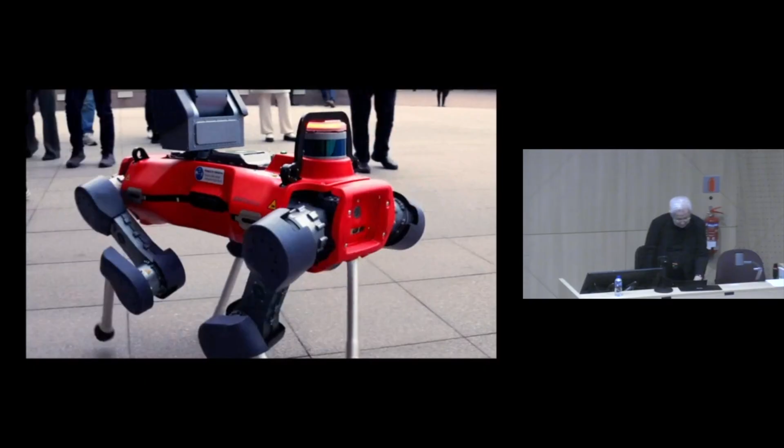The Robotics Center idea is really about how we can bring an environment for collaboration. Our idea is really bringing multidisciplinary research to work together with industry to create innovations that will make an impact on our planet and on people.

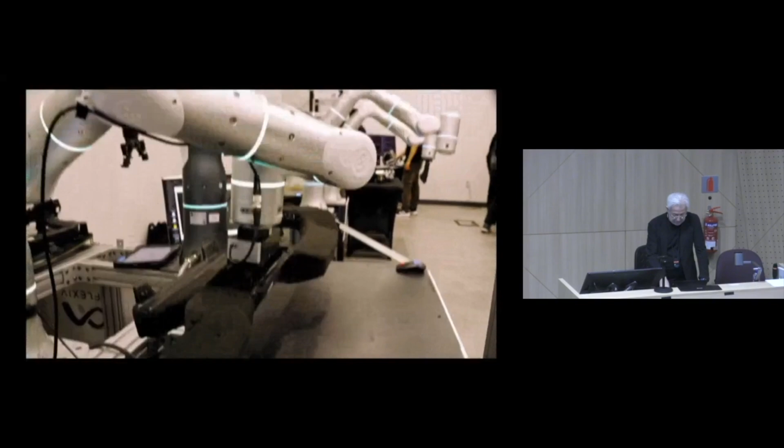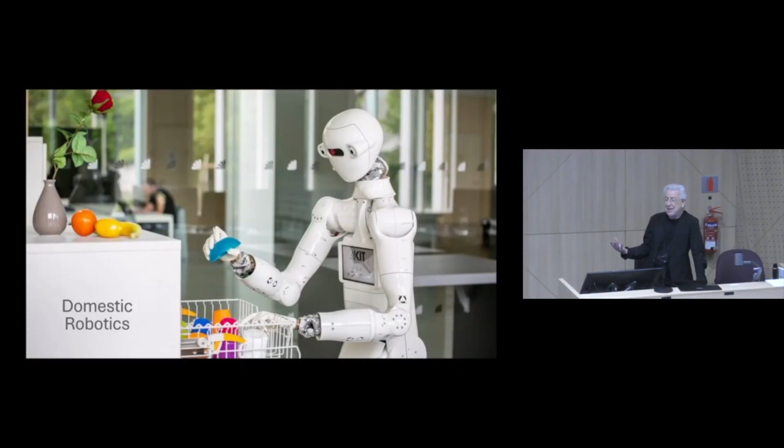So at the opening, we had about 1,000 people attending, and it was an amazing gathering, discussing all kinds of research topics, from domestic robotics, assistive robotics, human-robot interaction, new material technologies for sensing, new ways of thinking about surgery.

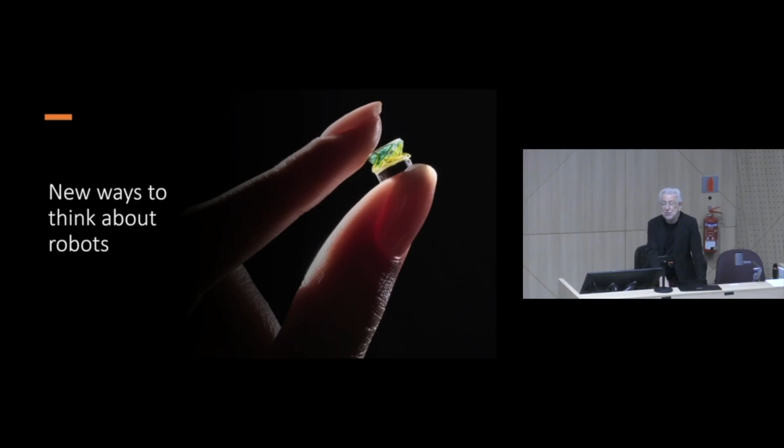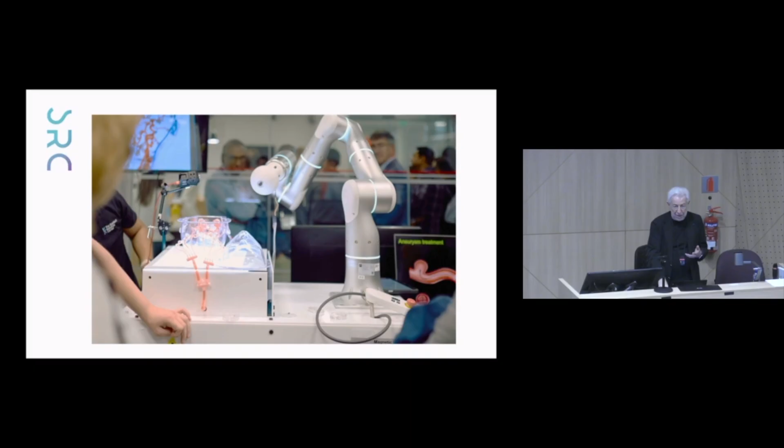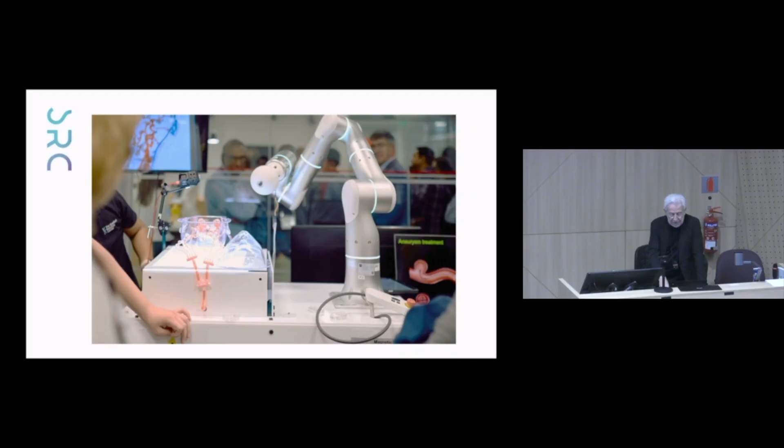We all know about Intuitive Surgical, but there are much more things to be done and new ideas to come. This spinner you see here is controlled with a magnet, and this magnet could be miniaturized and put inside a robot arm. By injecting this spinner into the bloodstream, we can do surgery in the brain. So it is quite remarkable, all these new ideas that are coming.

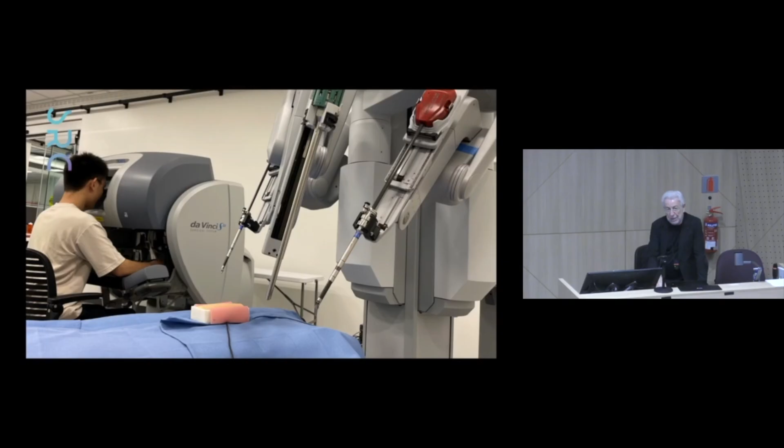I will discuss ultrasound scanning a little later as an example of how we work with haptics and teleoperation. Of course, we have new ideas about how to improve the Da Vinci system. There is a lot of work in motion capture of human motion, but this is not only done for art—it's also done for understanding human motion, to help athletes, to help injured people, and to also animate robots.

And basically it's quite interactive. There are a lot of interactions that also bring therapy for kids with problems in communication, and all kinds of language communication with different robots. These are collaborations with the Karlsruhe Institute of Technology, and there are so many other collaborations and projects—this was just the first day.

It was, I remember, November 1st was a Friday, and we had a whole day of presentation on Saturday with buses bringing people to the center back and forth, and it was really quite amazing.

Just to summarize, what we are trying to do is really to create this bridge between research and the real world, where we are able finally to see the result of our research, but when integrated, work together with everyone else through collaboration.

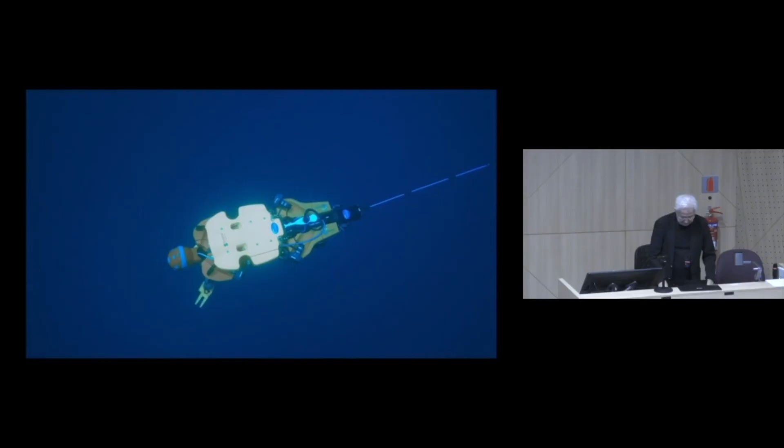This robot would enable archaeologists to excavate countless wrecks of warships, merchant ships, aircraft, and submarines from every era that have up until now been totally inaccessible. But how can we be sure that OceanOneK will withstand the extreme pressures? Or that its bionic hands will be able to recover sunken objects from the abyss?

So the Archaeologist of the Abyss is a documentary film that has been receiving a lot of awards, and we will not see the film today, but I have a very short summary at the end, about 6-8 minutes I will be able to show. Now, the film tells the story of the expedition we had in the Mediterranean around really the end of COVID. It was quite interesting.

We were building the robot during COVID, and we were assembling this robot and testing it in the pool that was declared a laboratory because there was no one allowed to go to the pool anymore. And we were able to take this robot and deploy it in all these locations from 40 meters all the way to 1,000 meters.

It was quite amazing because going there, we needed a boat. We were working with our colleagues in the Department of Archaeology in France. Here on the boat, you can see the robot being deployed. To the left is the control room where we have the haptic devices. With the haptic device, you are able to touch and feel what the hands of the robot are touching. And through the eyes of the robot and your stereo vision, you are able to see what the robot is doing.

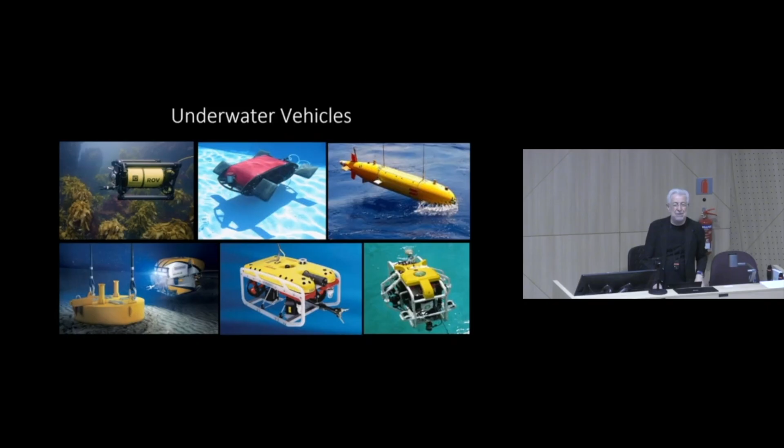So what is different? For those who don't know OceanOne, what is different from many of the great robots built that allow us to explore and see what is underwater, very deep? Well, this robot is capable of manipulation. This robot is capable of interacting with the physical environment, not just to see, but to do. And that means now it is complicated. You need sensors, you need arms, you need grippers, you need to coordinate body motion and everything.

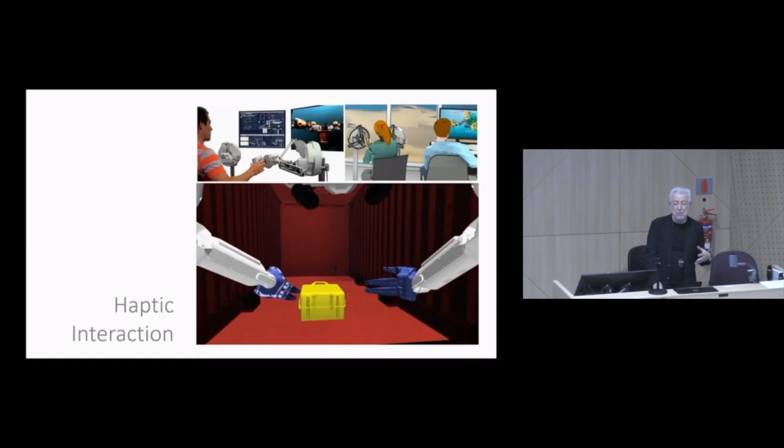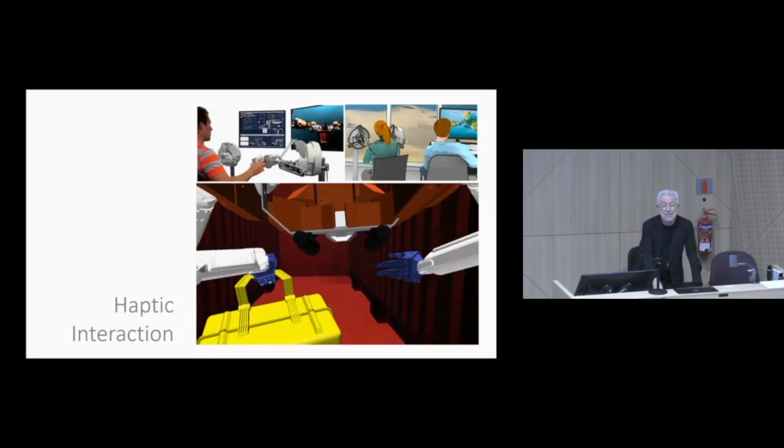And this is what was the concept. Any concept like this is going to be tested in simulation. We have an incredible environment for simulation, which I will talk about later for those interested in using it. This environment allows us not only to simulate, but also to touch the simulation with the hand of the robot, the world inside of which you're operating. And the whole idea is you build autonomy on a robot.

But a robot needs not only to work in known environments and do average tasks. You have very challenging tasks that require the expert. If you think about an archaeologist, they will not remove any object before touching it and finding the stiffness, and whether the object is really locked. They will not break it.

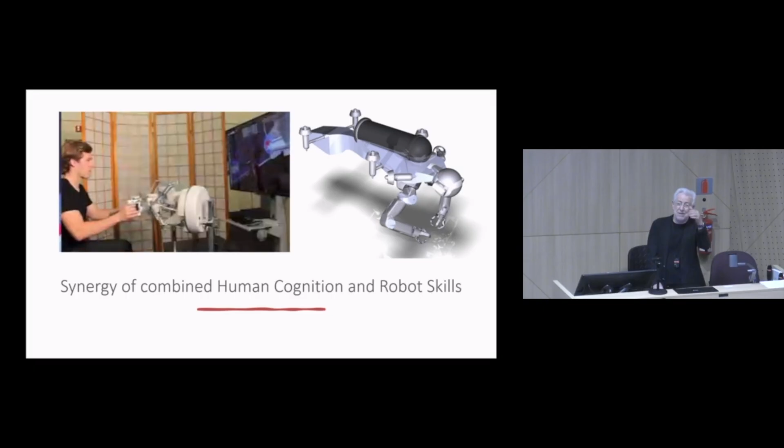So this is your sensor in the water, and the water is very deep in the oceans. It is not something that a human can reach. A human can reach 60 meters. The average depth of the seas is almost 3,500 meters. There is no way to go beyond a few hundred meters with saturation, that's a lot of conditioning to humans to reach a depth of maybe 100 meters, but then that's over.

So what you don't see is this is also happening on the robot. This is where the dynamic characteristics are changing and modified, and that means you need to really understand that dynamic so that you can create postures for the robot when you approach objects.

If you think about the right hand of the robot, well, it is extended, and in that extension you are going to feel a huge amount of force. You will feel the inertia of the body, you feel the mass of the body if you hit with the arm extended. While in the left arm, it's much lighter, you just hit and the joint will move. This is very important in the way you think about how you position, orient, and define your postures as you control the robot.

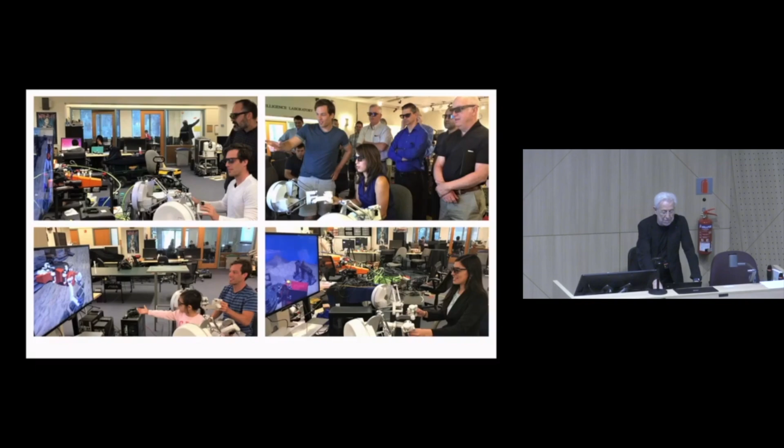The first version of the robot was deployed in 2016, and this is the setup at the time. Haptically, you interact with the simulation, and here's the robot in the pool at Stanford in 2016 before the deployment, getting ready for the deployment that took place in April 2016.

And the first robot was capable of going to 200 meters. We went diving to 91 meters on La Lune, a vessel of King Louis XIV, and we recovered a beautiful Catalan vase from 1664. It was a big, big thing. You can look at this image and see the history of the water, centuries went by covering that vase.

That was big news in France with the interest in archaeology. For the archaeologists, it was like the first time they said we had new technology since Jacques Cousteau brought so many technologies to archaeology. Now, archaeology is huge, and it's also under a lot of pressure because with the warming of the waters, fishery is becoming more challenging as we go deeper and deeper, causing destruction of the seabed and disturbing a lot of very important shipwrecks. So archaeology is under a lot of pressure to restore and see what is in there.

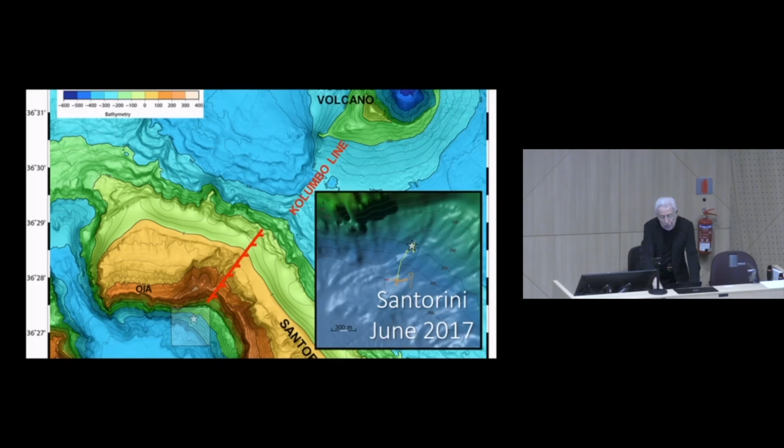Scientific work requires a lot of intervention too. Here we were in Santorini at the volcano Kolumbo to help scientists in their mission of studying that volcano. The challenges for oil and gas are huge. Everything humans build underwater is built above water, lowered down, and when we have a small problem, we have to move everything up and stop production for oil and gas, or stop all the communication and things we are doing with those structures. So there is a huge interest in maintaining structures underwater across many different applications.

The environment, of course, is a huge problem right now, and we need hands to do things there. The same goes for marine biologists. Marine biologists were part of the mission, and they were so excited to see the discoveries we were able to make inside some of the boats.

Now, again, I'm repeating: we need to connect the human to this sensor, your robot. We need the human maybe to give high-level instructions to the robot. So you build autonomy on the robot, and as we will see, this is only functional autonomy - navigate, grasp, do things. But the bigger picture of cognitive autonomy is not there yet, and you still need the expert. As long as we need surgeons, we still need human experts to work with those machines.

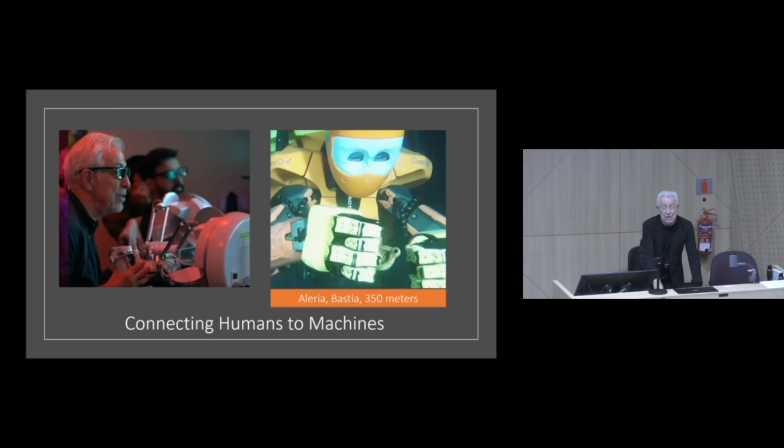Now, it's not only about underwater, not only about construction, not only about all the applications that require skills of humans. We're talking about creating a connection between human and machine through an interface that is intuitive, easy to use, and brings every sense needed, from touch, visual, sound, etc.

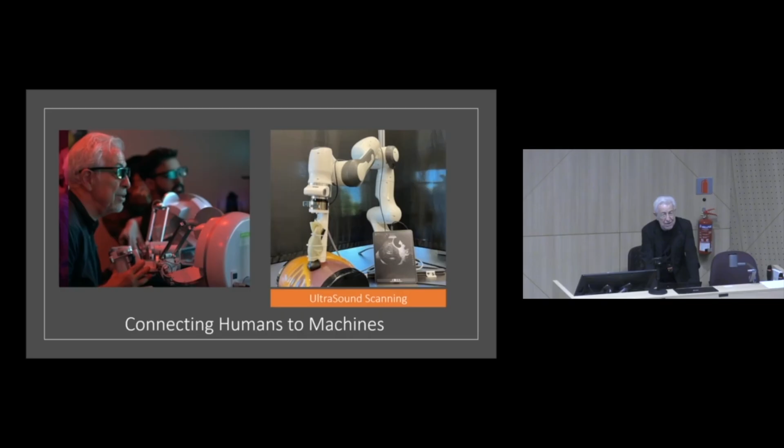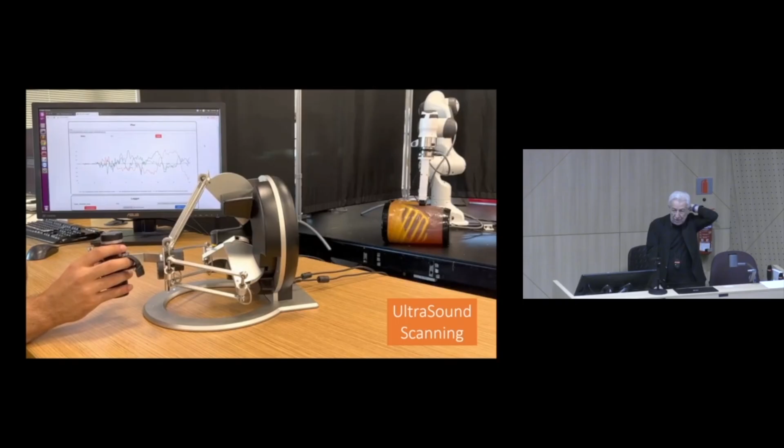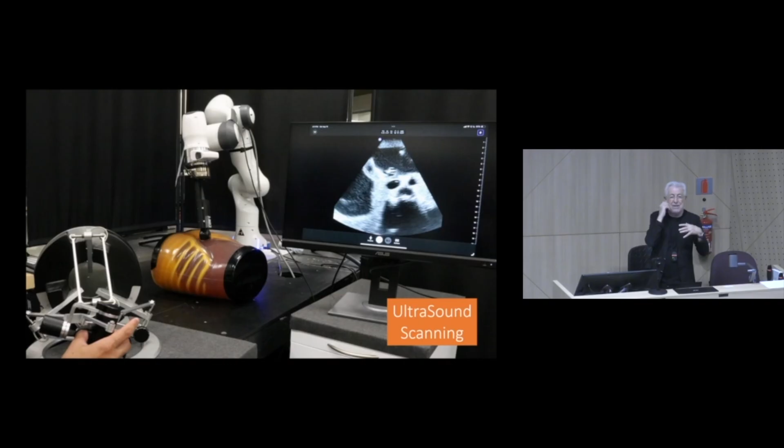In ultrasound scanning, there's a lot of interesting things emerging for underwater and other applications. Ultrasound is basically done by a human, and it's very challenging, you hurt the wrist of a human very quickly. Now you are doing this comfortably through a haptic interface, much easier for the human to monitor.

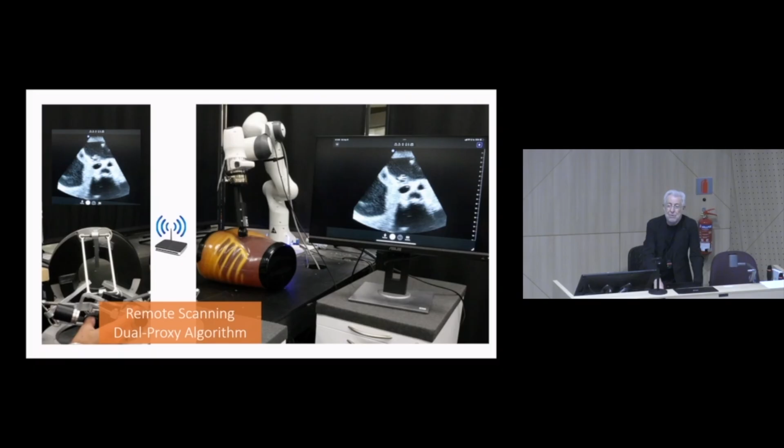Do we need the human to be in the same room? With a cable, maybe we can go to a different room. But with the internet, we can go to a different building, a different city, a different country. Now we're opening the way to something really interesting, because we can think about the robot being in one country, and the control, the surgeon or radiologist, in a different country.

And then you have a loop, a teleoperation loop, and this teleoperation loop will go unstable very quickly because of delay. So we know that, and if you know a problem, you solve it. How do we solve the problem? Well, it's unstable because you are feeding back a state to the system.

But how about if we create two autonomous systems? If we create two autonomous systems, now the exchanges between them will be set points. And we know set points are 10 times slower than the feedback. Immediately you gain 10 times the time for the delay. So we are able to handle a second with this approach, and we proved this in different venues.

One of the ideas in all of this is, how about taking our radiologists virtually to every village that does not have a hospital, which covers most of the planet. Now you can reach those locations with a robot that is going to do the ultrasound imaging. Your hands are in a hospital far, far away, and you're connected over the internet to this robot.

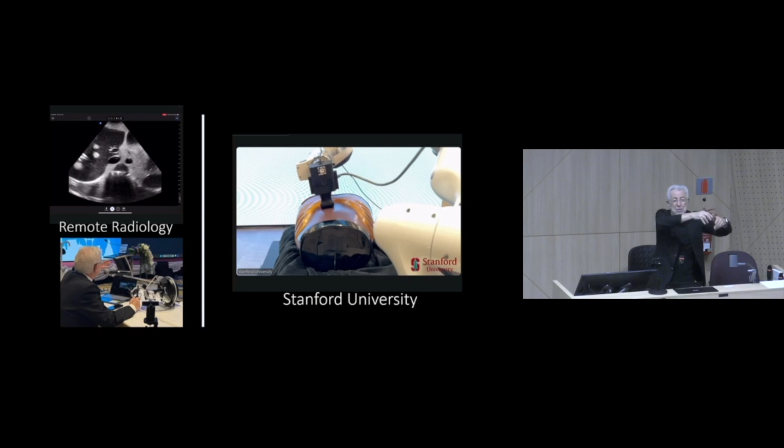How should we move from that configuration? Essentially, what we're doing is, if it's a dangerous place, we're connecting people while distancing them, but reconnecting their skills. This is really the beautiful idea: now the medium is this capable robot. You can almost talk to the robot, speak to it, which we can do now, but still you need to touch and feel what the robot is.

If you are going to buy something, you want to touch it, feel it, and you can do that now. So the internet that allowed us to see the object we are going to buy now lets us touch and feel them before even buying. This is a huge progress for the physical internet. Basically, we are now able to reach beyond just the data displayed, but more into high frequency touch and feel.

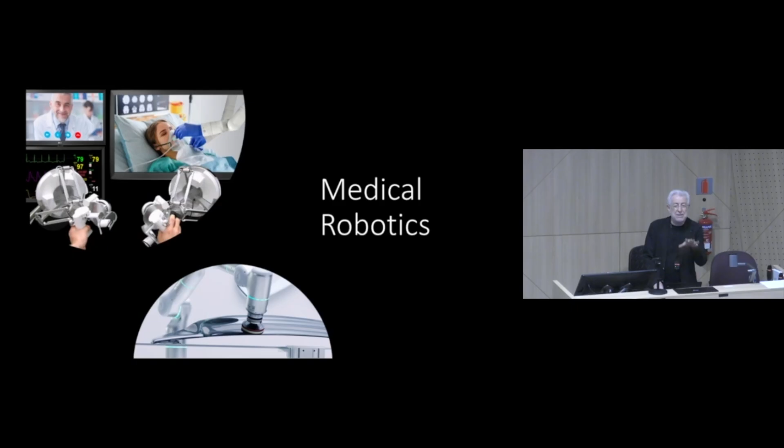When we apply this in the medical field, I always emphasize this: what is our major concern? For me, this is the concern: safety. How do we handle safety today? Well, almost everyone handles safety by programming the system with software, by putting in sensors, shutting off the power, and saying we are safe. And this is not right.

We really need to create safe robots, and to create safe robots, we need to think about the hardware. Very often we spend a lot of time wasting hours and hours fighting with the robot rather than really doing research, because we selected the wrong robot for the task. If you remember one thing, you really need to think about what hardware you have and for what purpose.

If we are doing physical interaction, you need hardware that has compliance, that has sensing of contact forces and tactile information. What do we have today? We have a lot of robots that are becoming more compact and miniaturized, but not back-drivable, or with little capability of torque control, which makes them very bad for force control and for any contact. What do we do instead? We control joint motion to reach a location.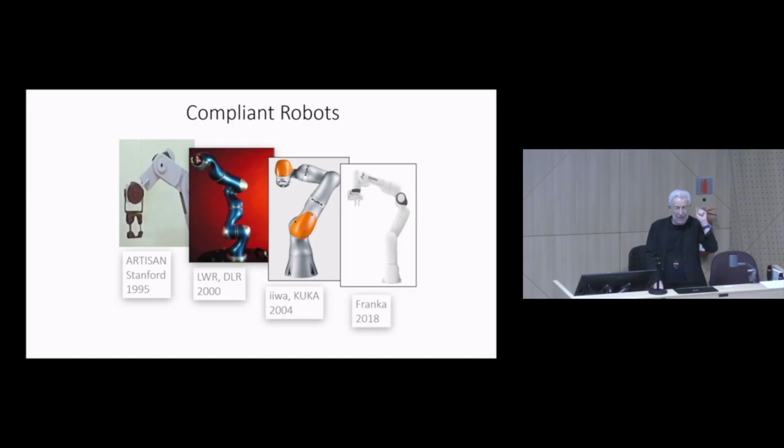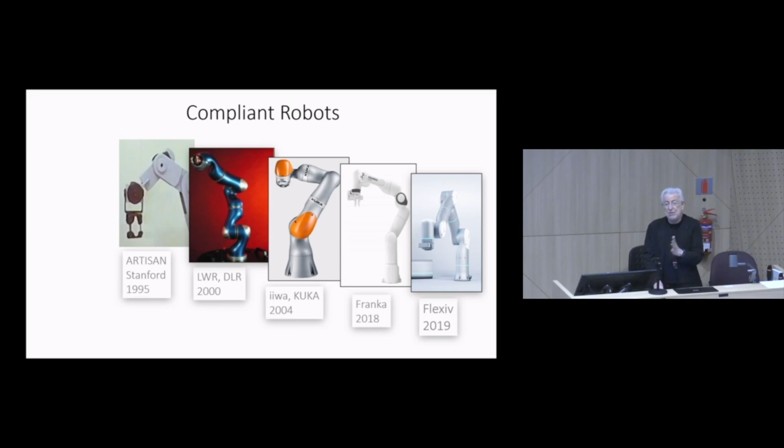It was the first concept of building a compliant robot that led to the LWR, the lightweight robot of DLR, that led to the KUKA that you know, that led later to the Panda - Franka, named after Sami Haddadin's daughter. Then my student started Flexiv, which is very successful - actually one of the best robots today in terms of capability for torque control. But all these robots that are supposed to provide us with manipulation skills do so, but not in an optimal design way.

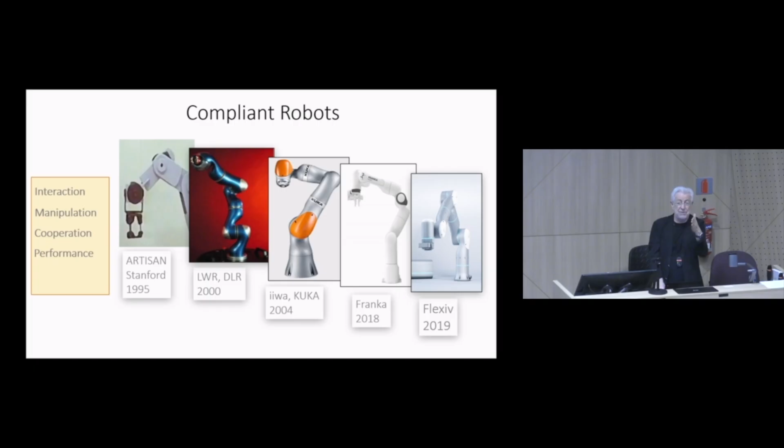If you think about rotating your hand, a human does it like this. This robot will require doing the whole motion. The reason is they don't have the symmetry, they don't have intersecting axes at the wrist, they have many offsets. All of that leads to challenges.

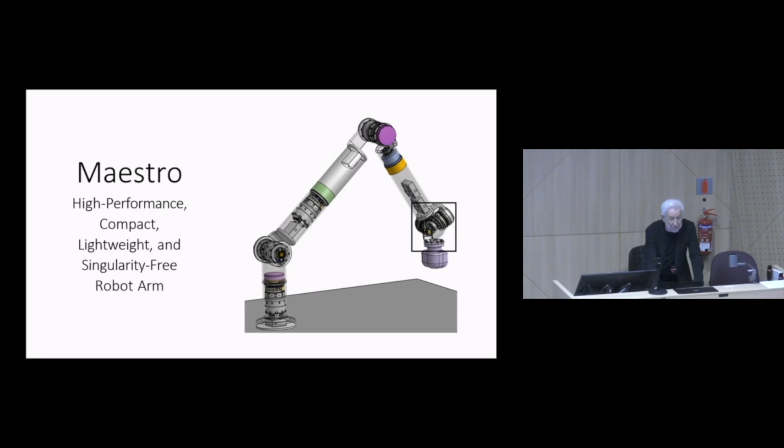So Maestro brings all of these improvements, but also brings non-singularity in the middle of the workspace of the wrist, which is a very big advantage because you don't want singularity in the middle of your workspace. Compared to other robots, it's much more compact, which means it's much safer. But this is not enough for safety. Safety is not going to come just from software or the weight of effective masses of the robot.

We're going to create safety by rendering the robot mechanically limited in its ability to reach beyond where danger can take place. So for each of the joints, we are going to reprogram the joint limits. By reprogramming joint limits, we modify the workspace - we have a module that reconfigures the workspace of the robot.

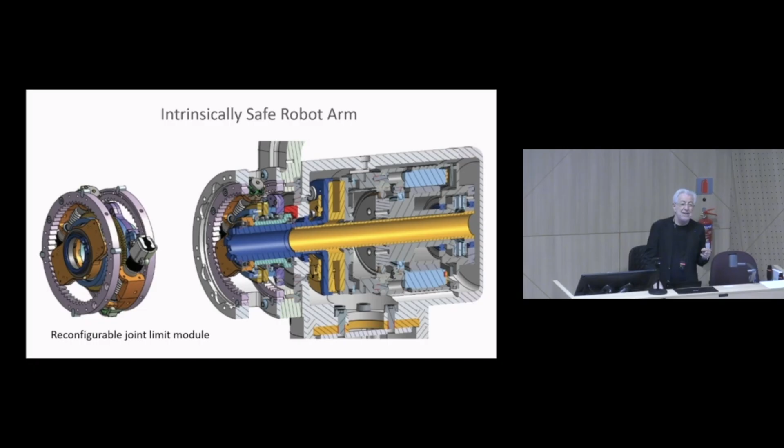Think about this in construction. Think about construction tasks from drywalling to painting to bolting to welding. We looked at all of this, and in every case we looked at a solution for how robotics can bring a solution to those things, and this is something that is going to bring interaction with the human.

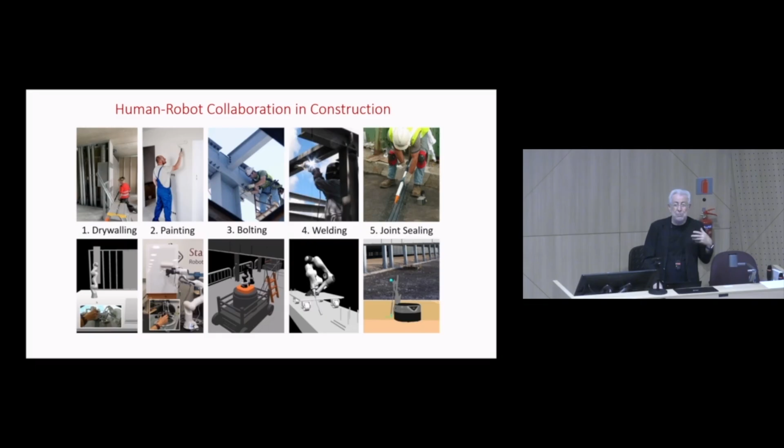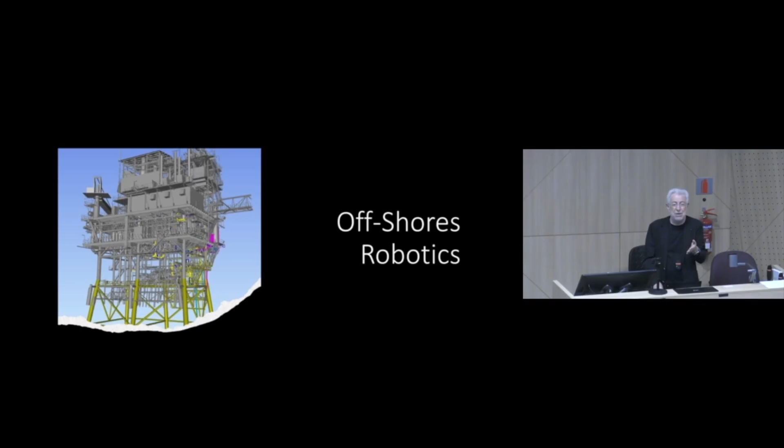It's the same thing. If we say we will remove half of the people from offshore, it's very difficult to stay offshore. We can control many things remotely from onshore. Can we do minimally invasive mining? Yes, we can do minimally invasive mining by rethinking the way we do mining. Right now, mining removes so much material, and we put so much mercury to extract a few grams of gold. Now we can do it with robots that are moving inside the ore and extract only what is needed.

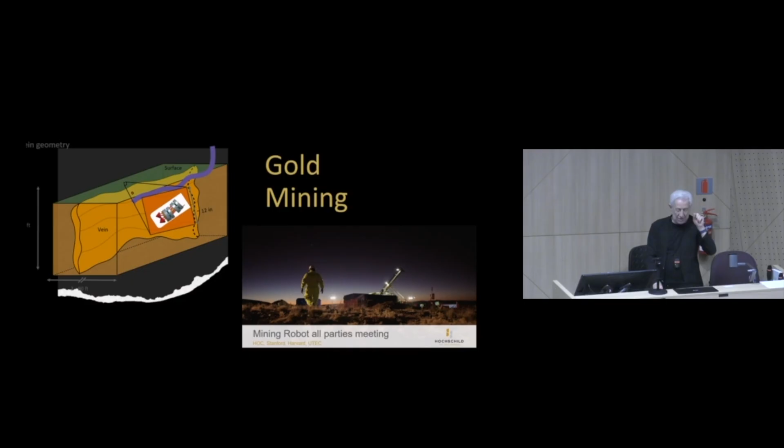In space, all the applications in space - right now we deployed a haptic device in space, and astronauts are controlling robots on the ground at DLR.

This picture has many features, and I wanted to focus on what makes all of these things I'm showing you possible, and how we came to be able to produce these results. So let's take a look. Anyone know Romeo and Juliet, beside Marcelo and Cecilia and my friends over there?

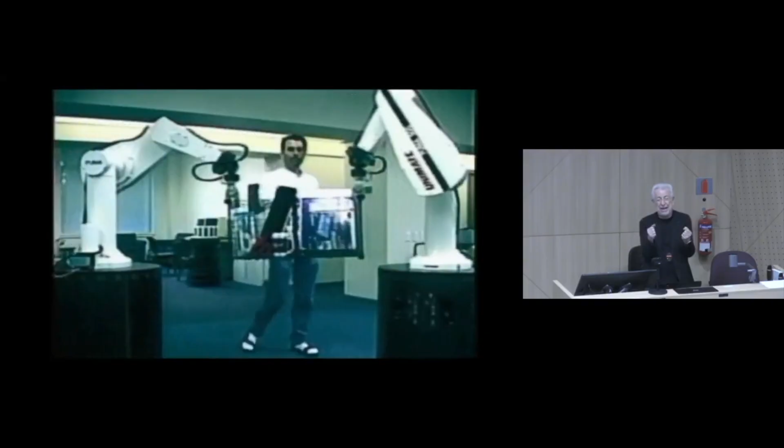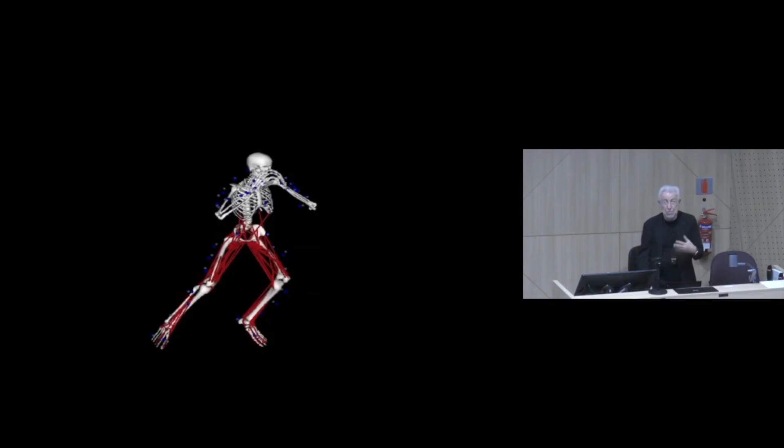Can you do this today? This is 1995. This is one of the most challenging tasks - how you can collaborate between two robots to carry an object like this, or interact with the robot through what was applied to ASIMO, which was inspired by human modeling. This is done with robot models of musculoskeletal systems that are being controlled using the same architecture.

All that work on humanoids led to more work on other concepts - how to use tools with the robot, and then how to use humanoid robotics for underwater applications. That was the first robot that we designed.

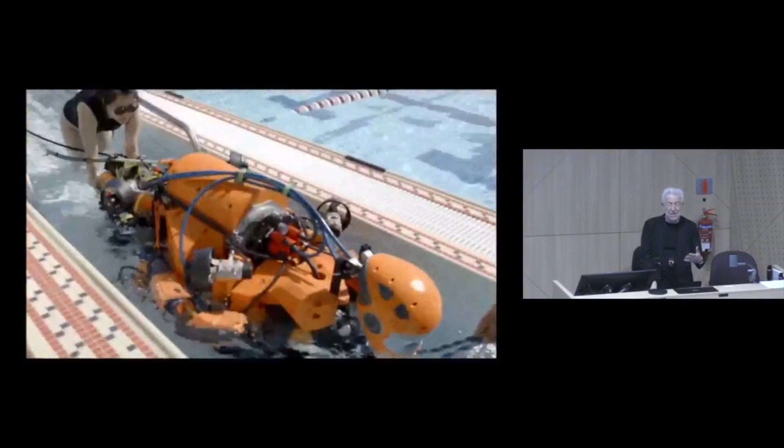So it all came together by developing the architecture of control to allow us to address the problem at more and more abstract layers, reaching the task level to control the robot at the highest level possible. There is never, along all these illustrations, any inverse kinematics or joint position control.

It won't happen, because human joint position control relies on the idea of precision. Humans are not precise. Humans are capable of performing a lot of things using compliance. This is how we control the robot - you just move the goal and the robot's hands follow your guidance.

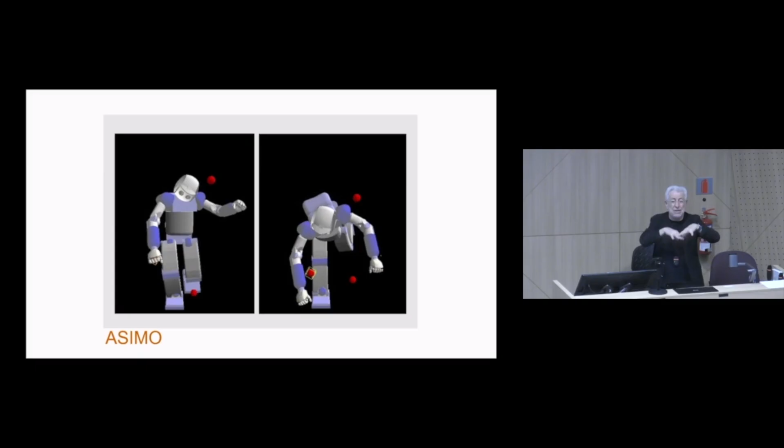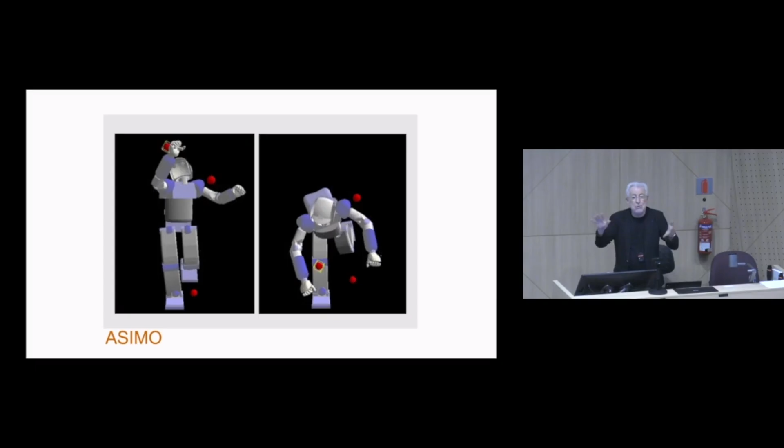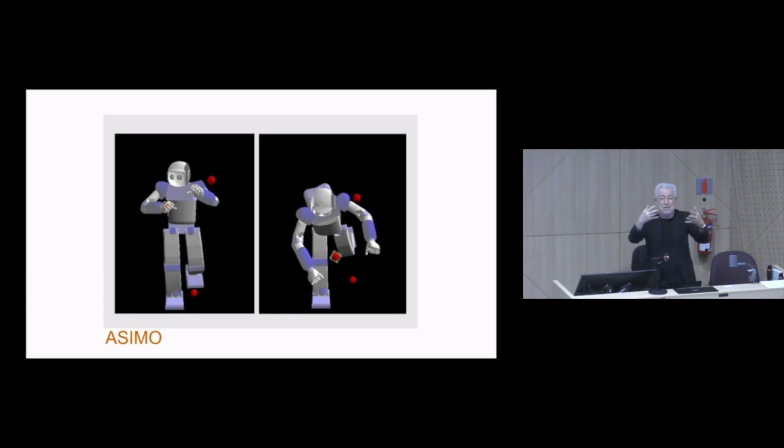The body of the robot doesn't know any joint at all. It knows only a criterion of a posture, which is a gradient descent to a goal you designed, and you apply it in the null space of the task. Sorry for the technical terms, but essentially you don't do anything - you just say move the hand, and the robot will follow, knowing that it has to maximize the range of the arm you are using, or minimize the effective mass, or whatever criterion you put.

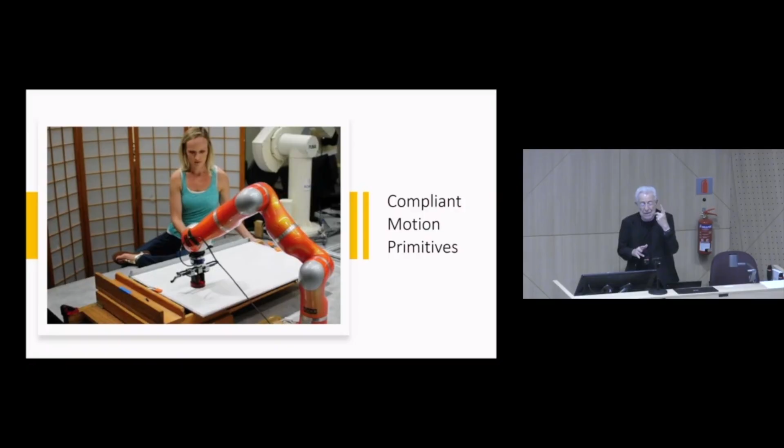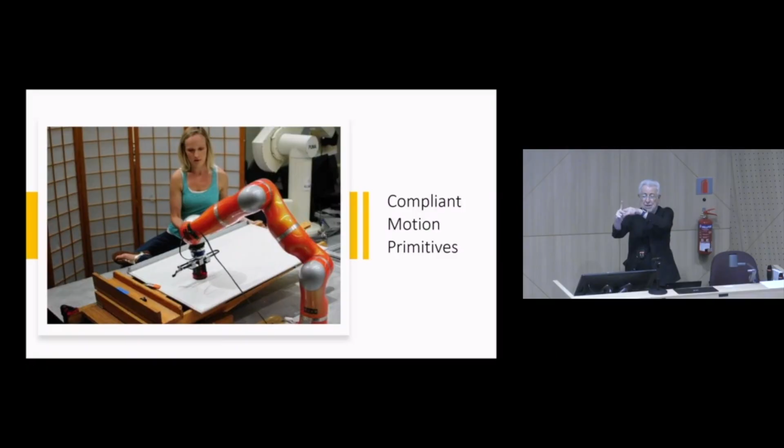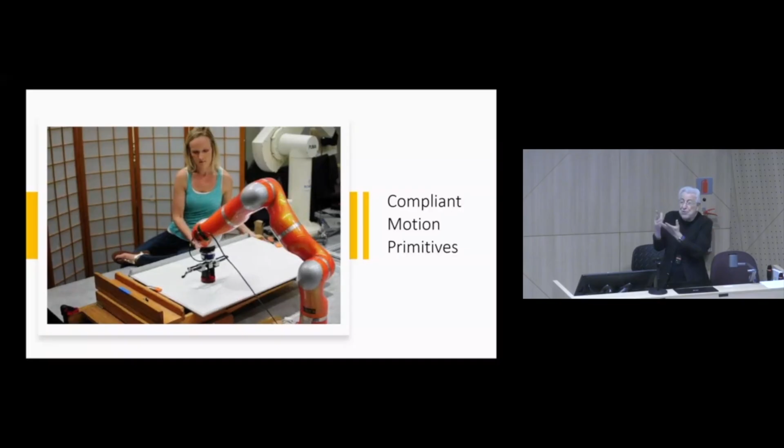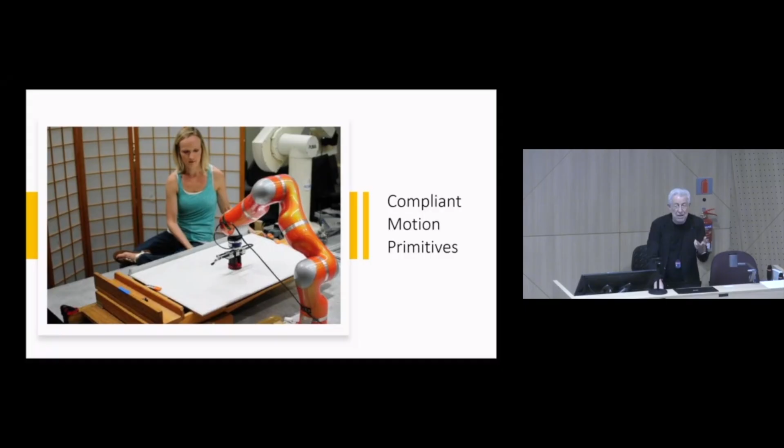So this, together with the contact - in contact we have compliance. Compliance results from a description of a frame, we call it the compliant frame. Do you know what frame we are using here? If we take this frame - Z force in this direction, moment about the two axes, and everything else is orientation or position control - well, it is relative to the interaction. It's independent of where things are. So this works, and it works not because of precise motion control, but because of the touch and the feel.

This is how humans work, and this is how we can learn from humans. So if we want to properly learn a manipulation task, we should not record trajectories - it's the wrong thing to do. If you record trajectories and change slightly the environment, it's over. And I'm not even interested in the trajectory of the task - I'm interested in what was behind the trajectory. What was the strategy the human was using? So we need to learn, but we need to learn abstractions. We need to learn strategies.

From a demonstration of a human, what I will do after segmentation is process it to make sense of it, to understand what was going on. To do that, I need to take all that data - not only motion, but contact, tactile information, velocities - projected on the frame, to extract that compliant frame. Once I have that compliant frame, I can build the strategy that can be used in a very general way.

Let AI do that. You don't need a lot of data centers to store all the trajectories. It's a big mistake we are doing today in many venues - we think, oh, just give me more data and I will solve the problem. No. You will have always cases where you're not solving the problem and you're not using the structure of the problem.

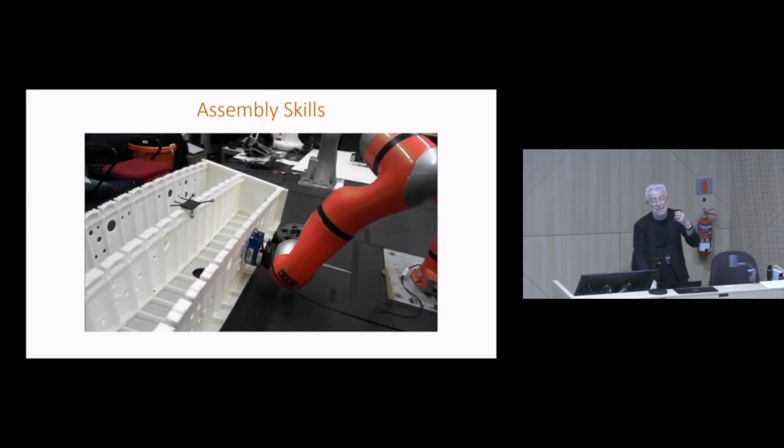So here are some examples. Here is an assembly task - this is a miniature of the wing of a 787. You disturb it, and the robot will go and perform this strategy. It is not a trajectory - it starts from anywhere and goes anywhere, but it is based on contact information. Disturb it again, and it goes and places it.

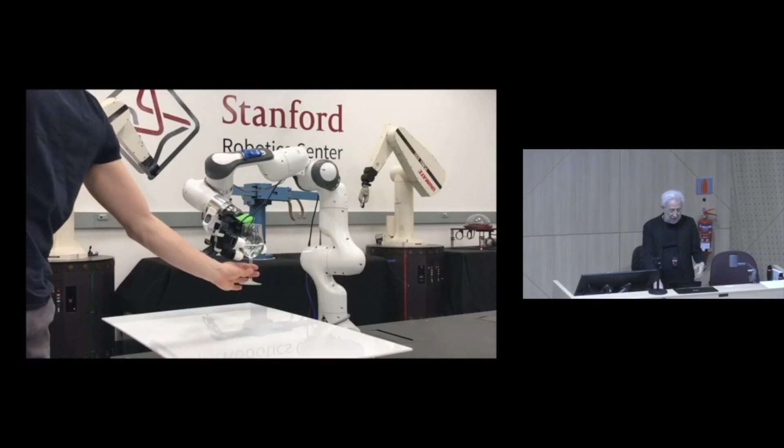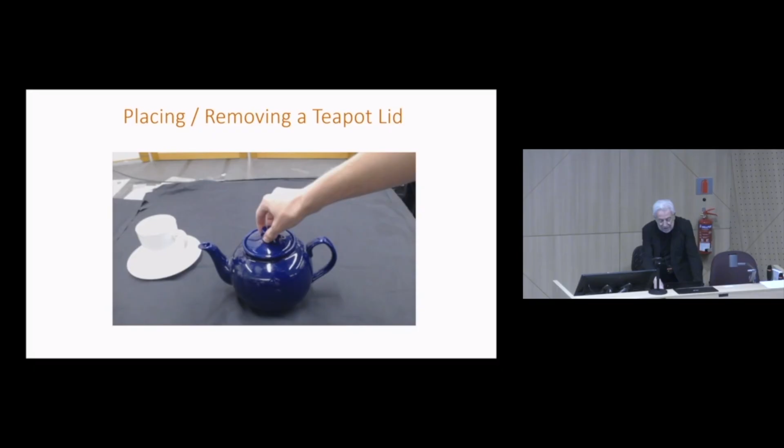Here is the interaction - these are student projects, developing very simple things. Once we have the proper architecture, that's it - everything becomes... this is an example. You see the humans are having problem putting this teapot lid back. 1, 2, 3, done. Okay.

We need to think about the software. So we need to get the right hardware, the right sensors, the right understanding of the models. But we need also a platform with which we can control this robot.

And believe me, you students, you were lucky because Marcelo has the platform now. I said it to Marcelo, but Marcelo is not paying attention. Marcelo, you have SAI, OpenSAI, right? OpenSAI is great, OpenSAI has everything you need. My students use OpenSAI - with this architecture, I will show you some more examples. OpenSAI is now being also integrated with ROS and all of these things. It gives you everything you need to control your robot.

Please, we need to build above. We need the next layer, so we know the connection between perception and action is about dealing with the requirement of each level. At mechanical level, you need high bandwidth - there is a frequency domain. Don't forget, it's not one loop. There is the frequency domain, and unless you run at kilohertz for the lowest layers to control the task, you're not going to be able.

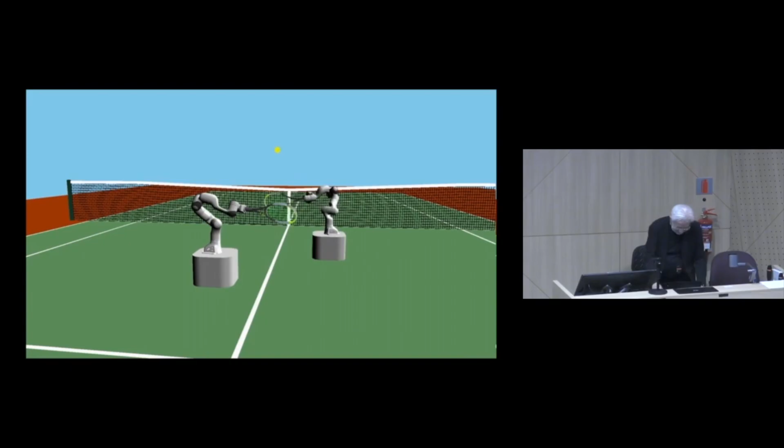Can you hear it? Yeah, you don't know if a robot goes crazy. Cut.

Okay, let's go back to - I have so many beautiful videos of balancing, of doing things. I was looking at the time, I didn't really want to integrate too many, but believe me, in 3 weeks the students are able to do things that even research labs cannot do, if we get the right tools, the right hardware, the right project. We discussed the project that starts in April and goes to June, and if you come to Stanford in early June, you will see some of those projects. A very exciting project indeed.

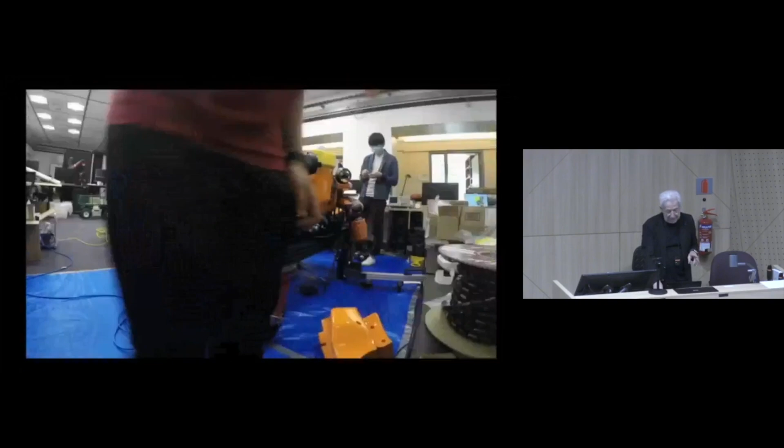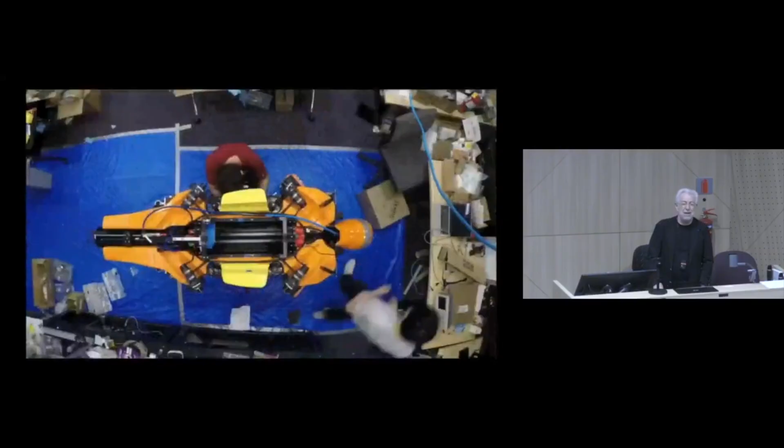So let's go back to OceanOneK. The OceanOneK project, as I said, was redesigning really fully the robot to deal with the deep dive, 100 times atmospheric pressure. Completely different foam material, completely different ways of organizing the whole system.

Very quickly we were able to demonstrate the robot in the pool at Stanford, designed a lot of cameras and tools, and then we took the robot to France, La Ciotat, near Marseille, deployed on Alfred Merlin, our boat, and there you have all the support. So when we deploy a robot, don't think it's one robot - you deploy a team of robots. You need the cameras, you need light, you need support, you need the relays. All of that makes it very, very complex.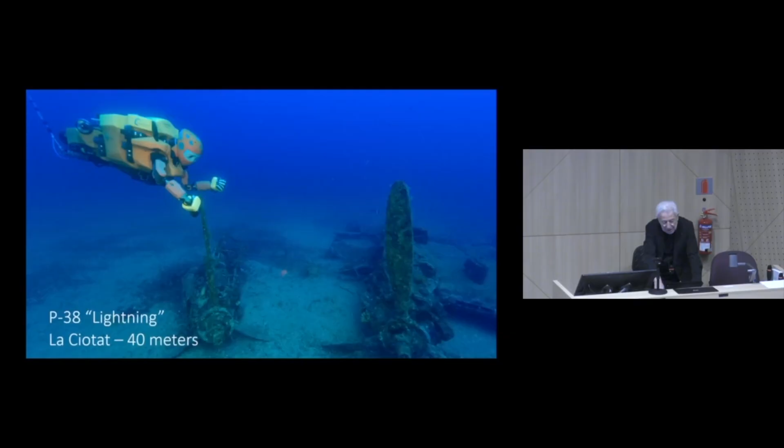And here is, again, the control room - your hands in the water, your eyes on the eyes of the robot. Now the robot is diving to 40 meters, deeper and deeper. Aleria is at 330 meters with a 2,000-year-old boat. And here is the treasure sitting there. No one is able to go there.

Look what we brought - this is a cup from Rome, beautiful cup, brought back without breaking it. The archaeologists were just amazed. Oil lamps - actually, the archaeologist was able to read the address on the back, and it is an address in Rome. Maybe we can order it through Amazon or something.

The marine biologists were very keen about having pieces of this coral, the white coral, very fragile. We brought a few pieces of the boat that were still left after 2,000 years there. And this is the control room.

This is the camera that we used to explore the Crispi at 500 meters. It was an amazing thing - here is Ken. We went diving, reaching the bottom of the sea at 850 meters. The robot kept going - 850 - and we were scared. We thought we lost the robot at one moment. And the robot kept going all the way to the bottom of the sea.

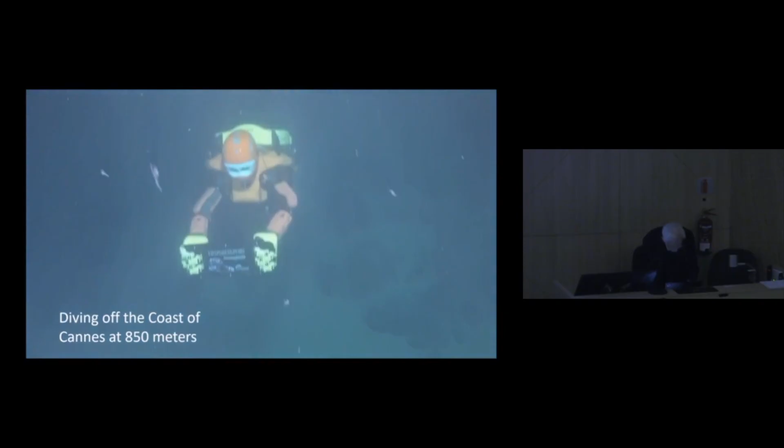Off. Good morning - this is at the end, we can put it. Yeah, very good. Yeah, that's good. That's enough. Okay, all right. Let's hope the sound is clear. All right, you're ready?

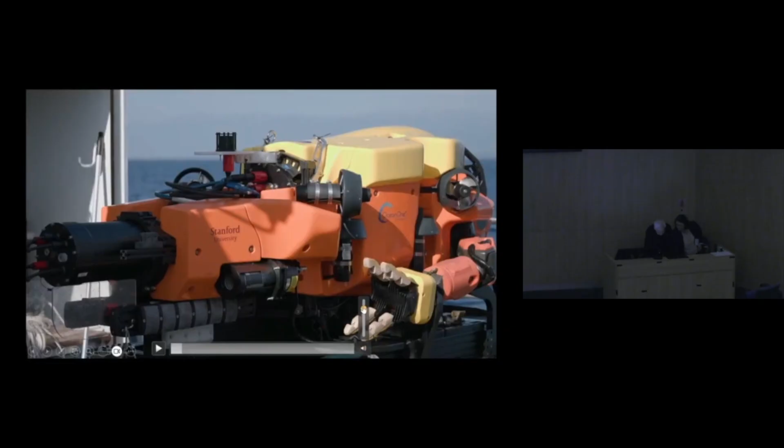You know something? Every time I try the sound, it is a problem, not only here, everywhere. I don't know why - we solved all kinds of things, like we can fly all across Mars, and we still haven't solved this problem. Okay, I'll turn it up. Okay, we try again.

In the course of 5 dives in the Mediterranean, OceanOneK will be pushed to its limits and attempt to reach a depth of 850 meters.

The other possibility is maybe I can take it from here. Let me try this. I need to get the maximum here. Okay, this is already out, no, I will take it from the speaker. So I'm going to try to take it from the speaker with the microphone here. Yeah, you should shut the... Is it better? Okay, we should go, sorry, we need more engineers please. You want to play that? I think just now. I'm changing back the sound system to this, yeah, but still it is, you can try. I reduce the feedback already. Okay, let's try one more time.

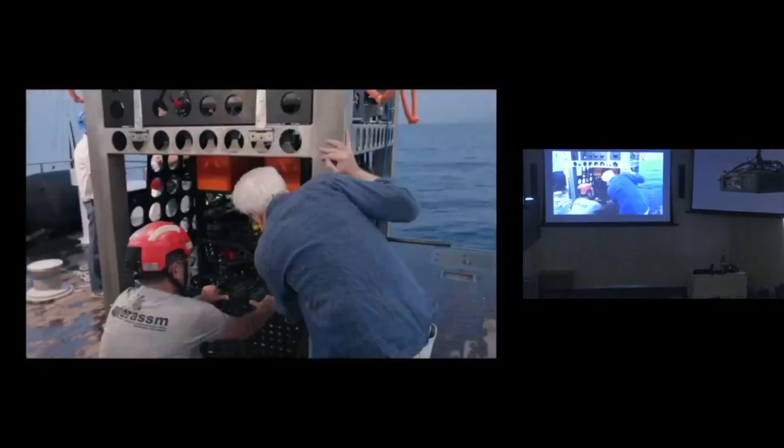This success is the culmination of almost 10 years of work by a Franco-American collaboration led by two men: Oussama Khatib, an eminent roboticist from Stanford University, and Michel L'Hour, an archaeologist and director of DRASSM, the organization responsible for conserving the underwater archaeological heritage of the entire French maritime domain.

OceanOneK is about to explore one of these endangered metal wrecks, the Francesco Crispi.

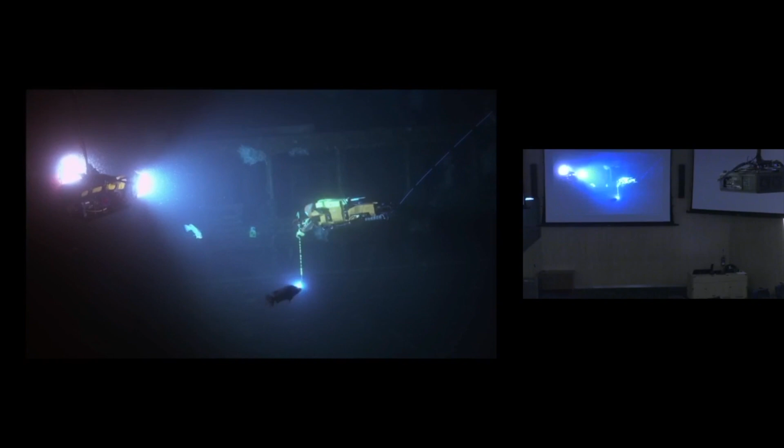After an hour's descent, illuminated by its lights, OceanOneK comes face to face with the Crispi. The wreck was discovered in June 2015, nearly 70 years after the ship went missing.

Okay, the camera is going in. Carefully, OceanOneK manages to insert its camera into the wreck for the first time.

Ah, that's great. So, are we trying to get into the living quarters? Yes, on the left. For Michel L'Hour and Oussama Khatib, it's a big first. Thanks to its revolutionary humanoid form, OceanOneK can squeeze into the tightest, most inaccessible spaces.

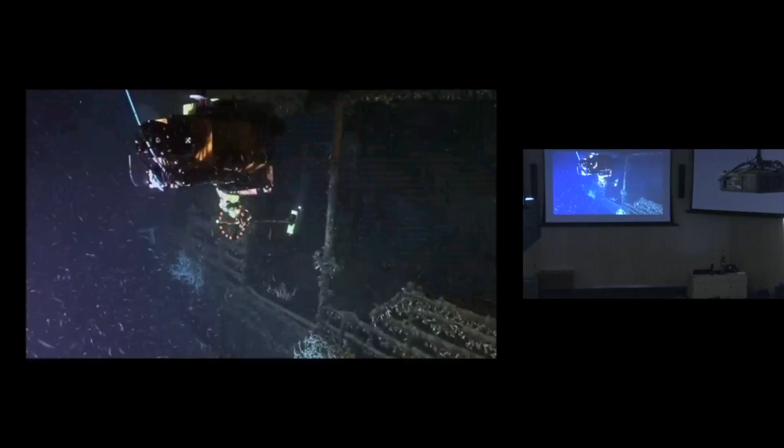We're going back down, it'll be tight. Very tight, yes. Moving carefully, OceanOneK ventures inside the wreck, something no robot has ever done before. And I'm going to go out back.

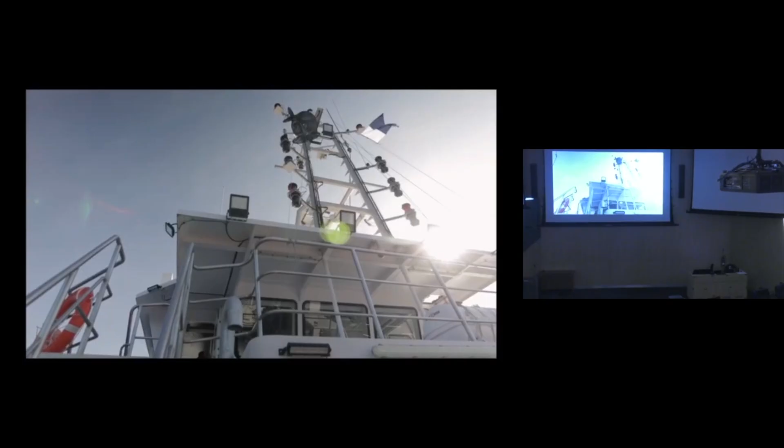We'll take 1 or 2 photos below, then go back up. OceanOneK completes its perilous but successful mission. Got it, thanks. In the Bay of Cannes, OceanOneK will now attempt its most difficult challenge yet, reaching the incredible depth of 850 meters.

We are very excited about reaching a new milestone in depth with this robot. Little by little, the humanoid inches its way towards the seabed.

And I'll go down and feel around here, underbody, yeah. Like commemorating the first steps on the moon, OceanOneK has taken along a plaque to place on the seabed.

We're going to hit the ground. Yeah, I'm going to hit the ground. Yeah, we touch down, we touch down. It's amazing, you're at 850.

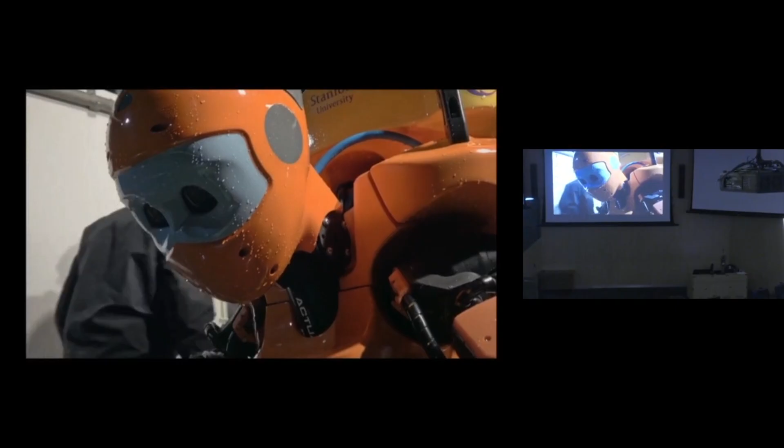After a descent lasting a little over 1.5 hours, the robot finally reaches the seabed. It has successfully completed 5 missions, demonstrating its stamina, dexterity, and powers of observation.

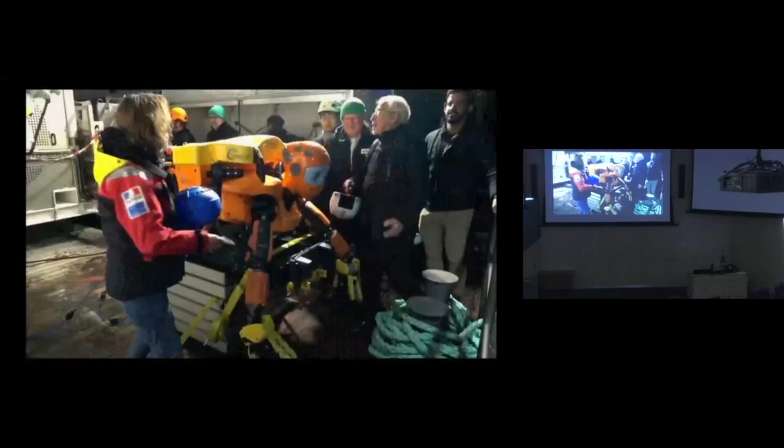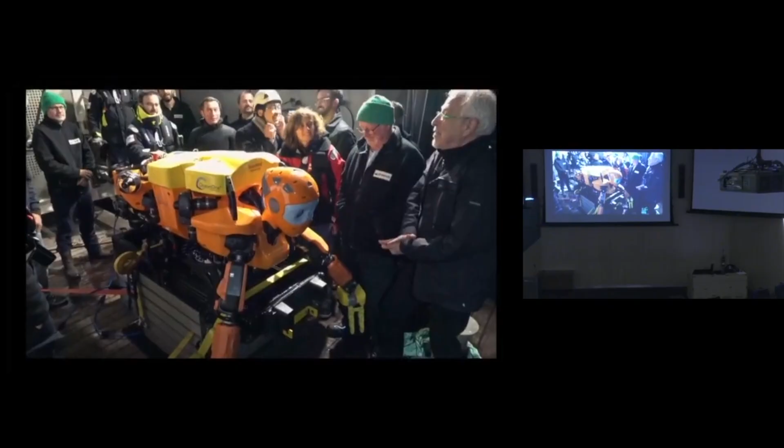Those who came up with the idea many years ago feel immensely proud. Bravo! Well done, buddy. OceanOne came to Cannes and carried off the Palme d'Or!

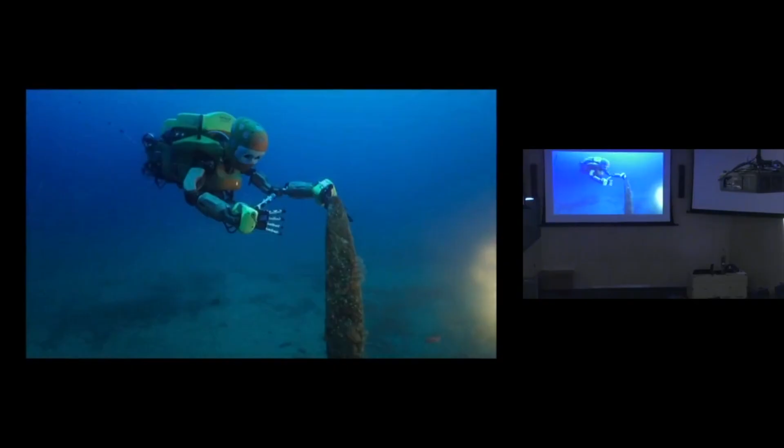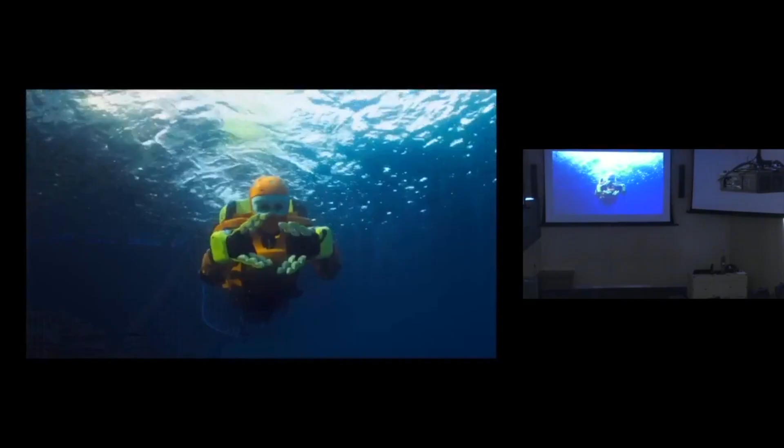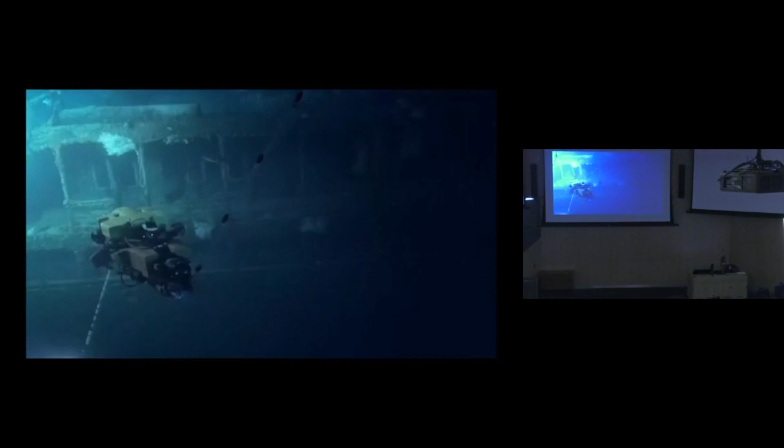This incredible mission is a world first, one that opens up a whole new chapter in underwater archaeology. Thanks to this humanoid, archaeologists now have access to thousands of unexplored sites, buried wrecks, and sunken worlds. It gives them the incredible power to make the ocean reveal its mysteries.

All right. I guess we need now to work on a new project related to sound. That would be really good.

Yeah, this was amazing. I mean, just you have to imagine this was done over almost 2 years, '21 and '22, because of COVID. We had all kinds of regulations that we needed to take care of, and the boat was not able to go without certification of sanitation and other things. So my students were really excited. We would go in 1 month, and then we return, and then we go again later. I think we were there 3 times: in September, in January, and we ended the mission on July 18th, 2022. And it was incredible for every student, spending the time on the boat and spending a lot of time on the islands, tasting the very nice seafood of France, in the south of France, and also in Corsica. So they are always asking me, when are we going to go next?